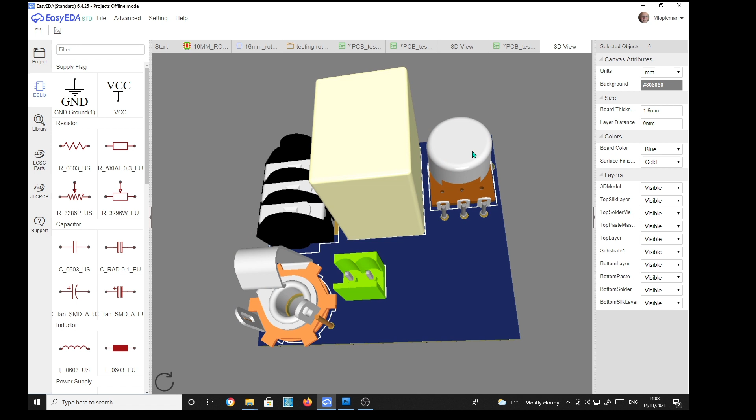Hello. Now all of these PCB component models you see on this bit of printed circuit board were designed by myself. They just came straight out of my old items box, and I decided to make a 3D model for EasyEDA out of them. You see this potentiometer here, I've made it complete with solder pins for it to solder to. It's just a normal potentiometer, not a PCB mounting type. So I've provided these pins for it, which will be soldered to it.

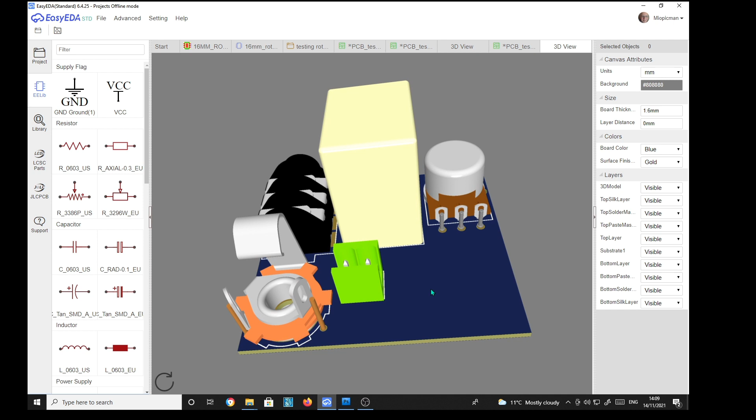And also this skeleton jack. I don't think you'll find a PCB mounted skeleton jack anywhere on the internet. So I've just added these copper pins to represent the connections to the tags and provided some pads for them.

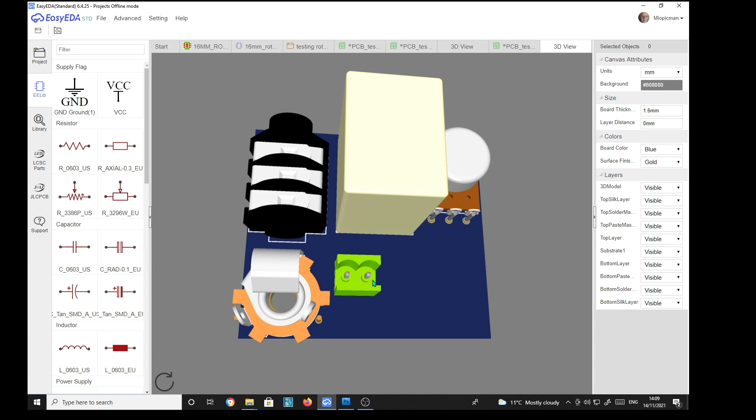This is a conventional PCB mount socket. This is a Bulgin stereo switched socket with normal solder tags on, and I've made slotted holes for it. And also a relay here with ordinary solder tags, which I've made PCB mounting. This one is a 4-pole 24 volt relay.

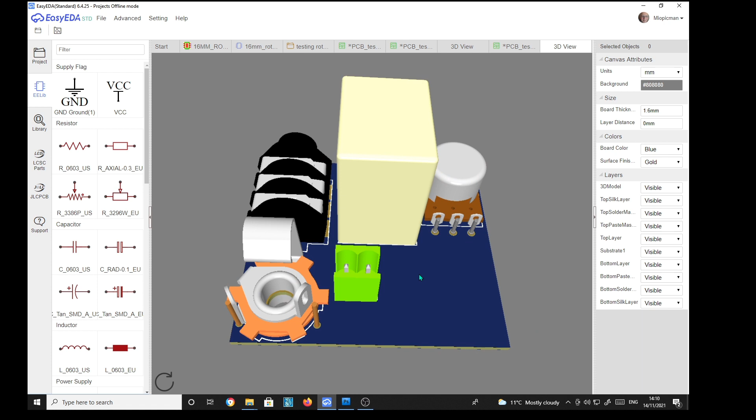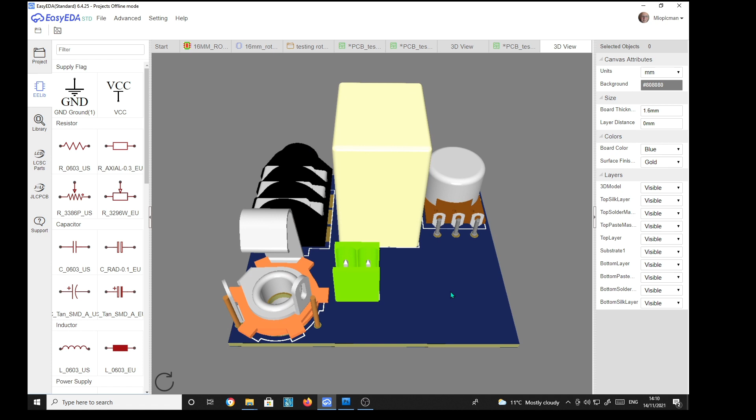So in this video I'm going to show another fairly complex component that I'm going to make. It's a 6-pole PCB mounting relay, and it's actually designed to go onto a PCB. It's got proper PCB mounting tags. In actual fact, it's now obsolete. You can't buy them. So I've got one or two of these lurking about, and I want to be able to put them on PCBs, so I'm going to make an EasyEDA component from it.

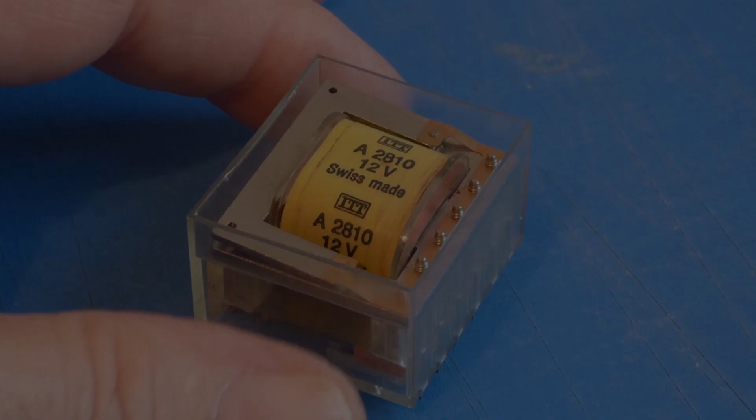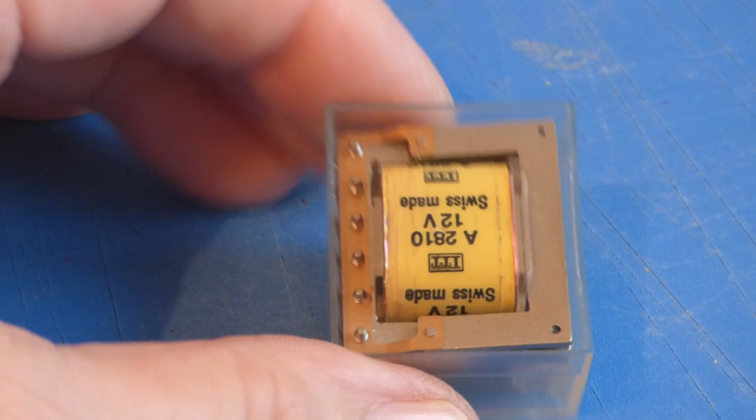And here it is. As you see, it's a 2810 12 volt Swiss made relay having 6 changeover contacts. It's quite a compact little relay this, and I'm sure there will come a time when I need a 3D model for EasyEDA to mount this on a PCB.

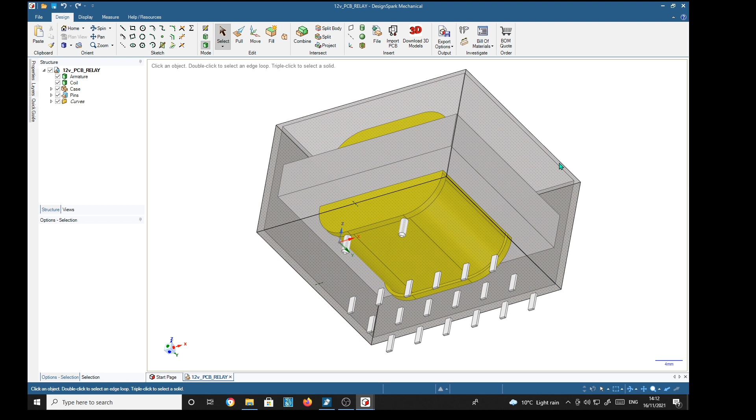So here is a rough representation of the relay I have made in Design Spark Mechanical. It's got all the essential details, which are the size and shape and the pins, contact pins here and solenoid terminals there, all PCB mountable.

So from this model here in Design Spark Mechanical, I'm going to make a footprint and a file suitable for loading into EasyEDA that will produce the 3D representation of the model. So I'll do that part first because it's the quickest.

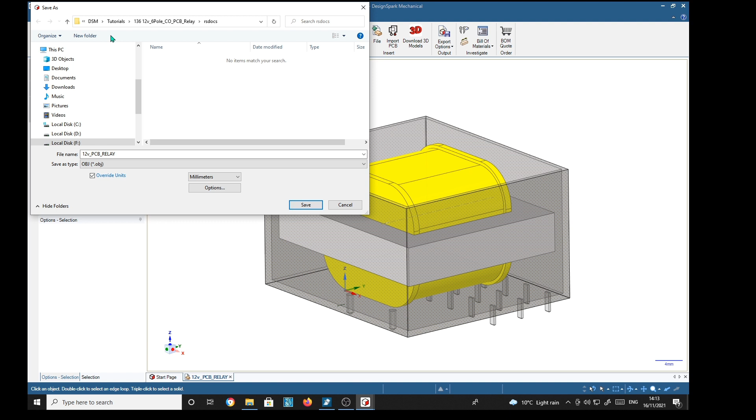So we'll go to File and Save As, and then Save As Type. Now it's OBJ, Object. I've got override units here and I'm in millimeters. So I need to be in the correct folder, which is EEDA. So we'll save that, and if we go to EasyEDA, we see that we have made not only an OBJ file but also an MTL, which is presumably the materials file. This is the structure, this is the materials.

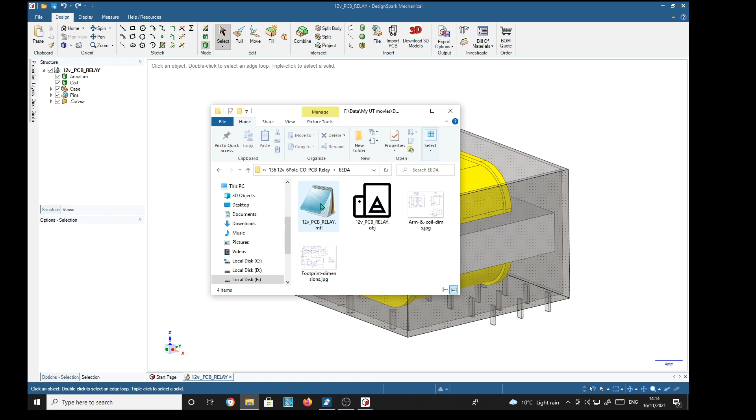So now for EasyEDA, we need to zip these two files together, object and MTL. So we'll control click, we've got them both highlighted, both selected. Right click, go to 7-zip, add to EEDA zip. Now that's the name of the folder that these two files are in. You see up here, this is EEDA.

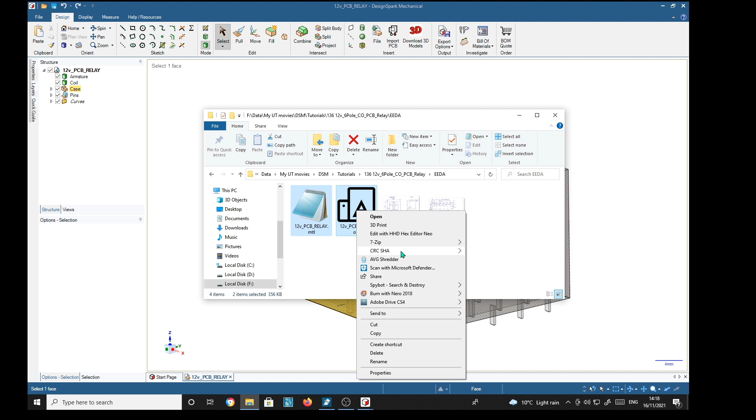So that's worth bearing in mind. If you wanted the zip file to have a different name, change the name of the folder. I suppose you could change it subsequently after the fact. So anyway, we'll select that and we get a zip file. So if we double click that, we should see those two files in it. There they are. Good. So we've got that sorted.

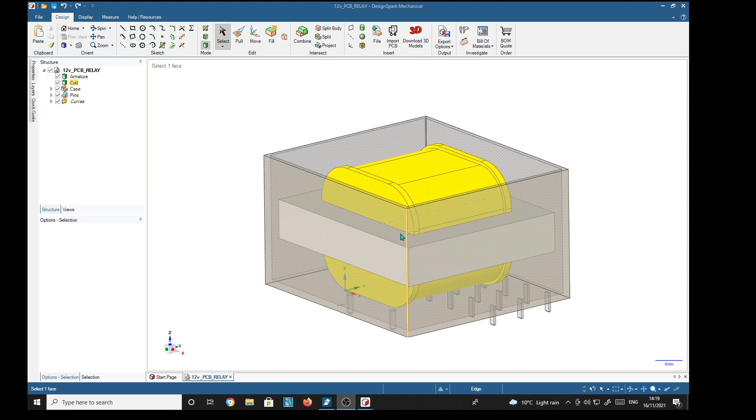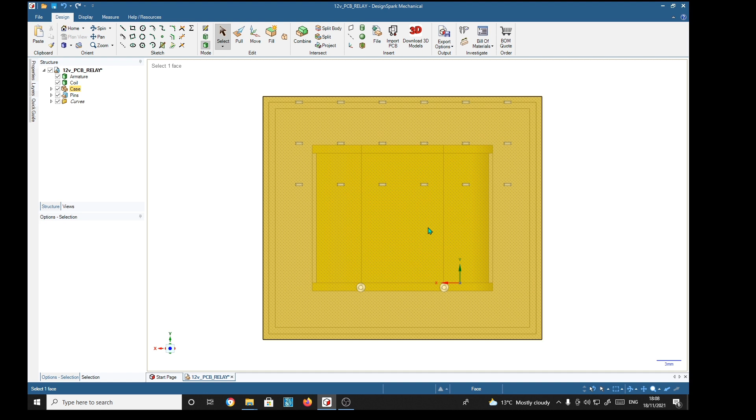Now the next job, just a little bit more complex, is to make a footprint for this thing. Now I'm going to orientate the model so that we can draw a footprint. Square it up down here with this gadget. Bring it a little bit closer. Now I need to draw on something, so I'm going to choose a drawing tool, dotted line. Now you see the cursor is containing a hatch, which means it's asking us to choose a surface to draw on. So we're going to choose this one, right, and the hatch goes away.

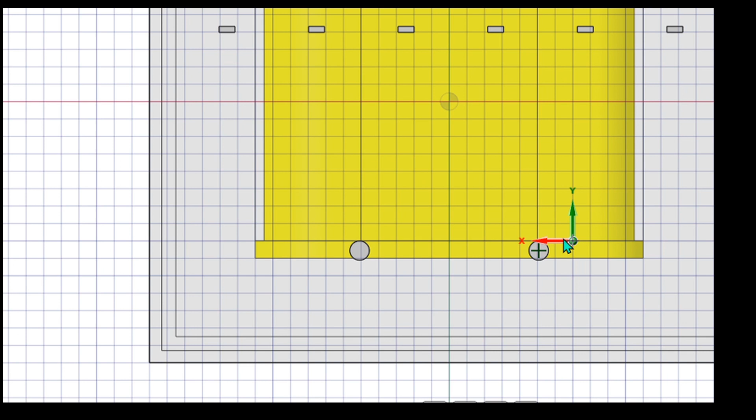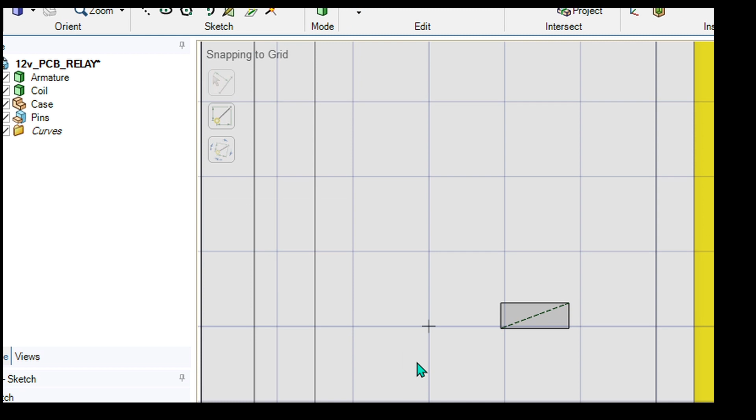Now I want to put circles around each pin, and you'll see why later. But the problem is, if you choose a circle tool, Design Spark Mechanical won't let you find the center of the rectangle. So we need to put an ancillary line in from corner to corner, because now if we try to draw a circle, it will find the center of that line, which is in the middle of the rectangle.

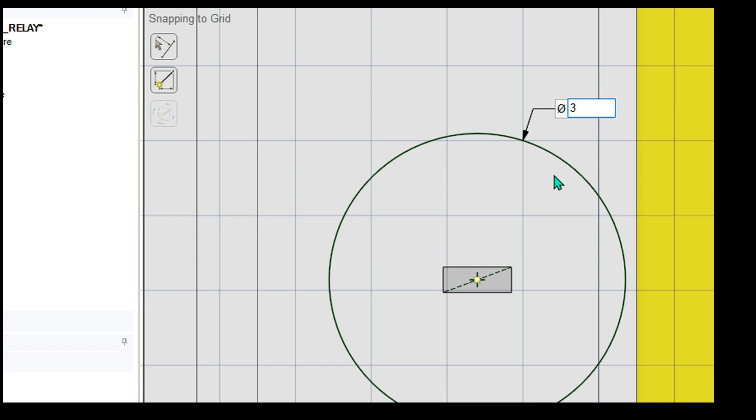So we're going to draw this out to more than 2.5. I'm going to make it 3 millimeters. Oops, that's not 3. 3 millimeters. You'll see why later. And we don't need this line anymore, so I'm going to get rid of that.

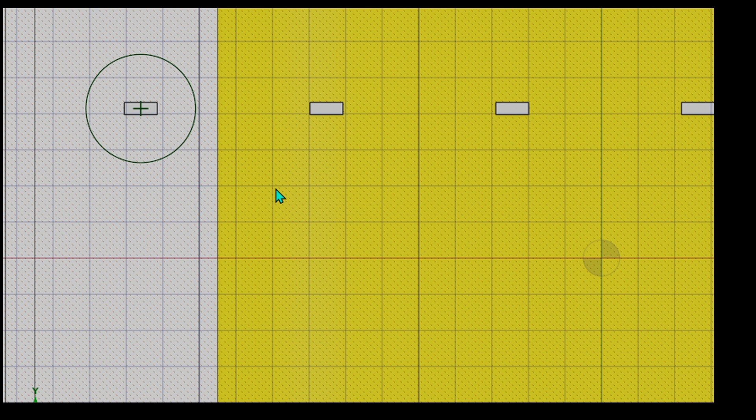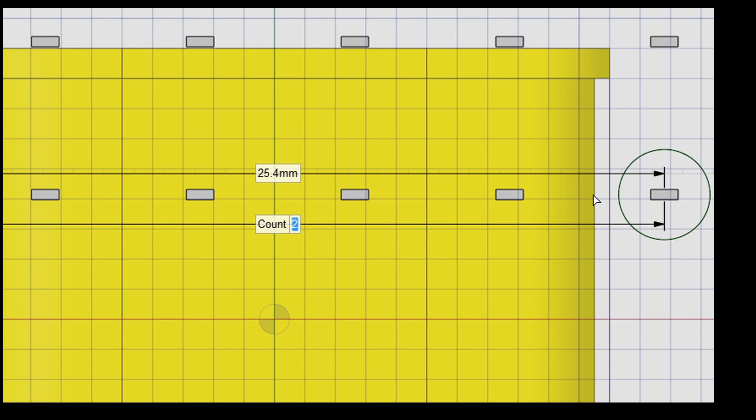Now I'm going to make an array of circles, which means we've got to use the move tool, select the circle, and create patterns over here. We drag it nearly to where we want. I know this has got to be 25.4 - that gets us right to the end. Now the count of 2 is highlighted, so I'll change that to 6. And we've got 6, spot on with the contact pins.

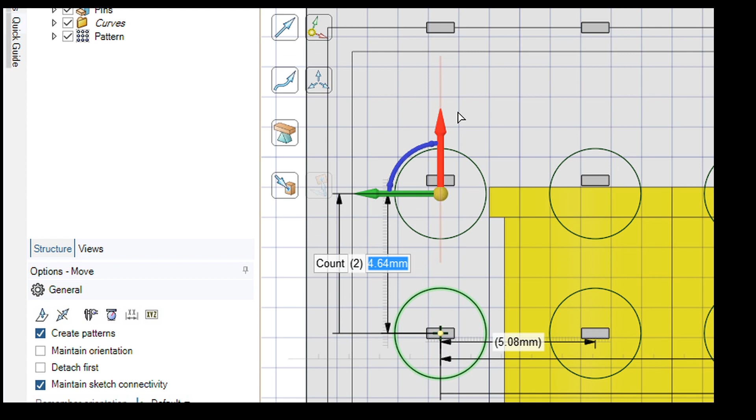Now create patterns again and drag this up to 5.08, which is 10.16. Tab. Now we're going to keep tabbing until we get to this count here. There, 2, we need 3. There it is.

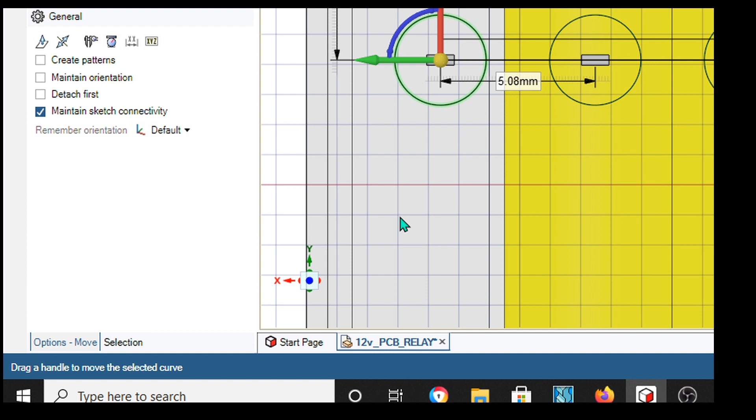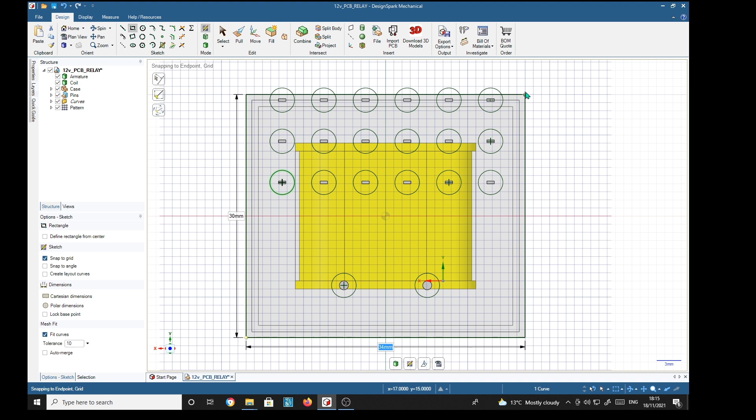So now I'll come out of zoom and we can finish off with the solenoid pins. So we can have one there and one there. And finally we need a bounding rectangle for the footprint. Now if we leave it there, the top line's going to go through the pads, so we'll go one up. There we are. Now we can turn these off.

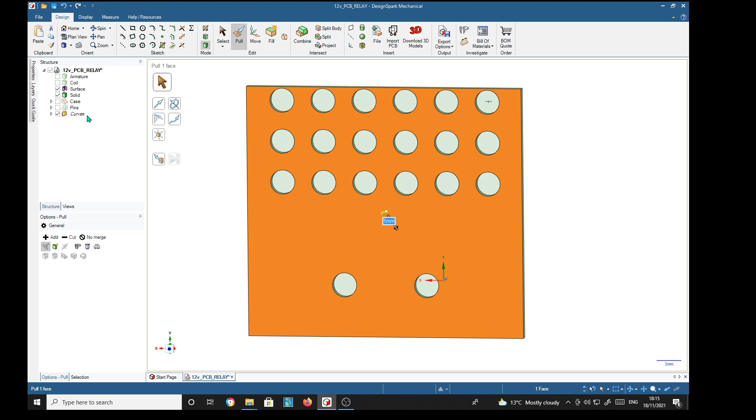We've got our footprint. If we pull the tool, select the surface, type 1 for 1 millimeter, and that makes it into a solid. We've got surfaces in the holes, so we can cancel them out, delete them. And what's going to happen in EDA is that these holes are going to just turn into circles.

So we'll square it up and save it as a DXF file. Save as. DXF. Now we'll save it on top of this one. Replace it, yes. And that's it. Now we can start to make our EasyEDA component.

We'll start with a new symbol. I'm going to base this on some sort of switch or contacts. Maybe there's one in the library. Yes, so I'm going to use this. Double click. And there we have our set of contacts. And we're going to end up with 6 of these.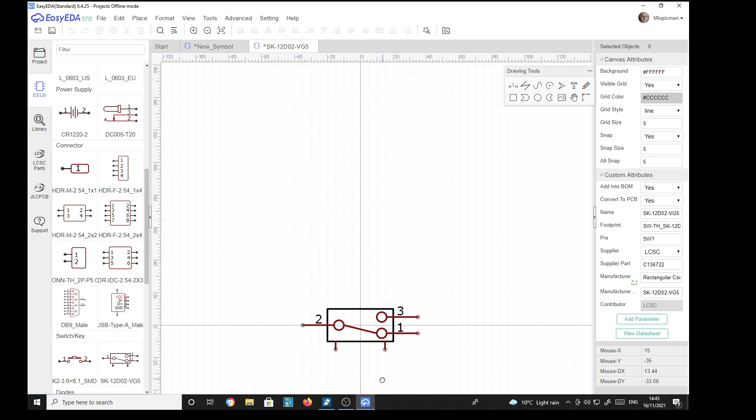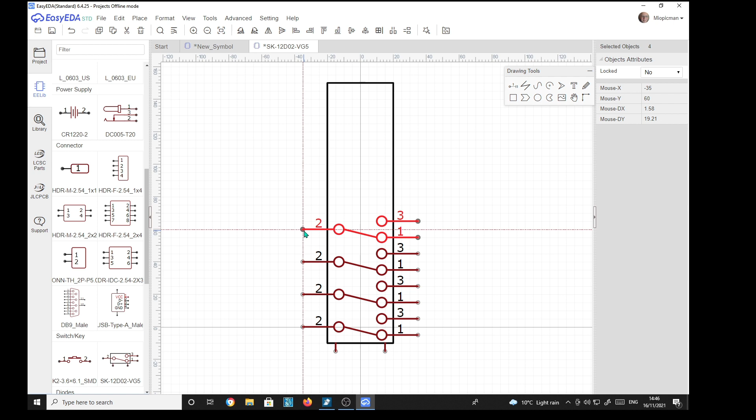I'm going to extend this up quite a bit and grab this lot, copy, paste. That's 1, 2, 3, 4. This 1, 2, 3, 4. This... 5 of them. This.

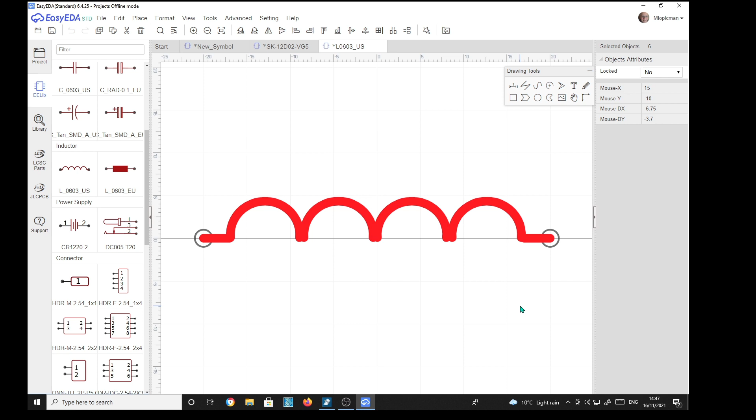Now we need a representation of the coil rather than just these 2 tabs here. I'm going to put a coil in. So where will we get that from? Ought to be a coil somewhere. There it is. Double click. Right, going to capture that, Control C, go back to a new symbol, Control V.

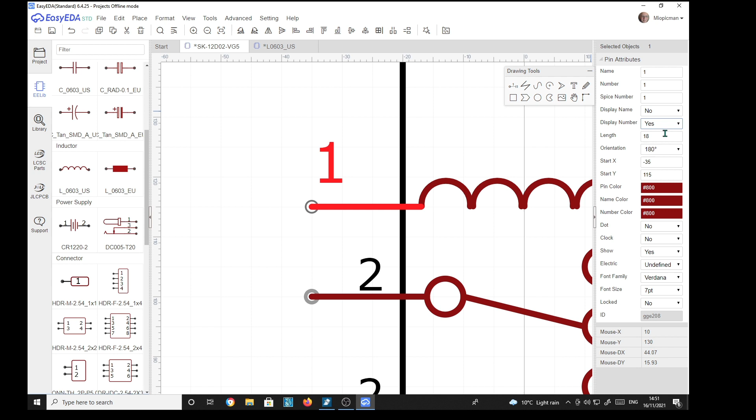18, that looks better. Let's change it from display number from yes to no. Yes. Right, we'll do the same here. Drag this out, length 18. And display number, yes. It's saying snap is 5. I'm going to make that 1. Nice.

That looks big. Now that 3 is 5.5 point. This 2 is 7 point. Now why did that happen? That 1 is also 7 point.

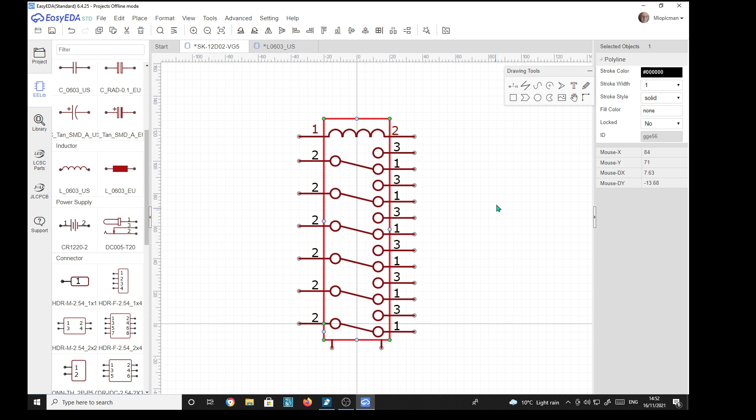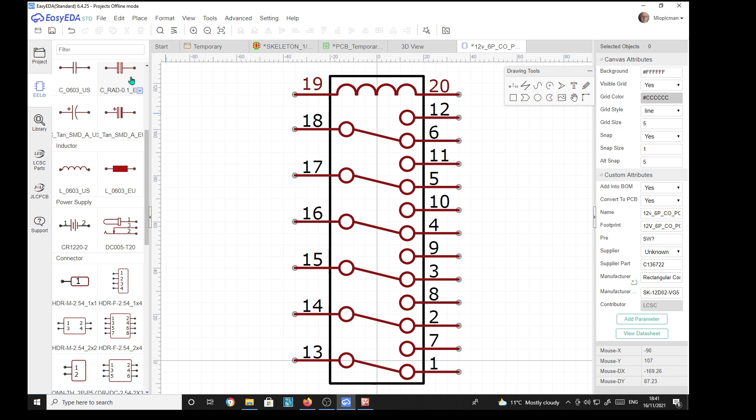And before we can save this, we need to renumber all the pins. Save as. Unknown others.

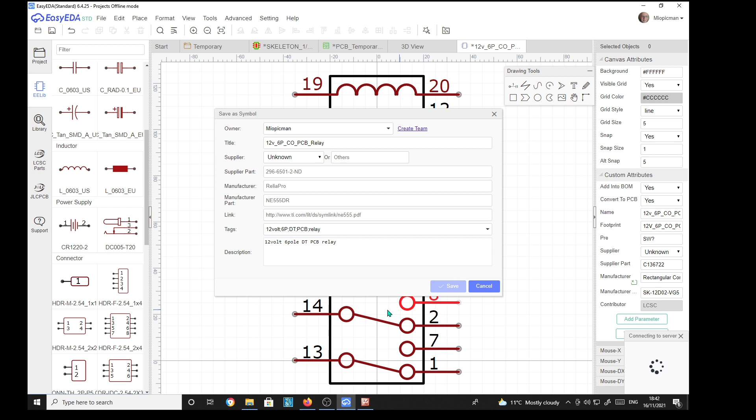New footprint. File, import DXF, select the DXF file, that's the one. Right, and just put it anywhere. Let's put the reference in.

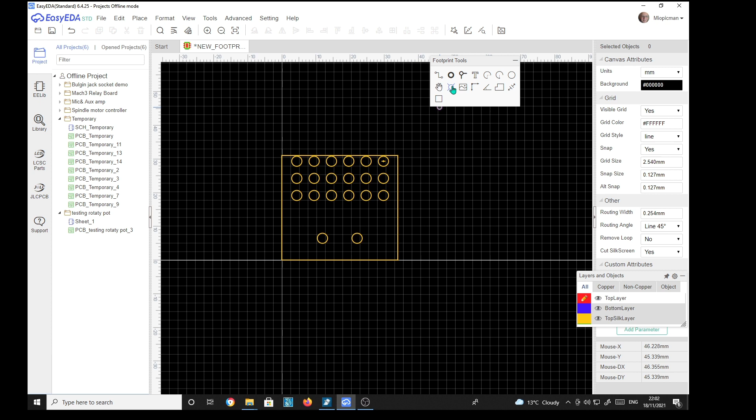Right, I'm going to make that one the right size. Now we're going to make that 2.5 with a 1.25 hole. You can copy that and paste it in to the center. See, it gets a dot in, which is nice.

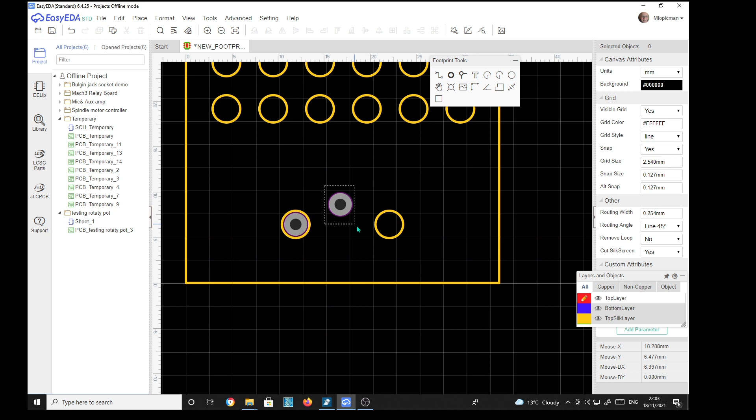Now, so we paste the rest, Control V. We need some more. Okay.

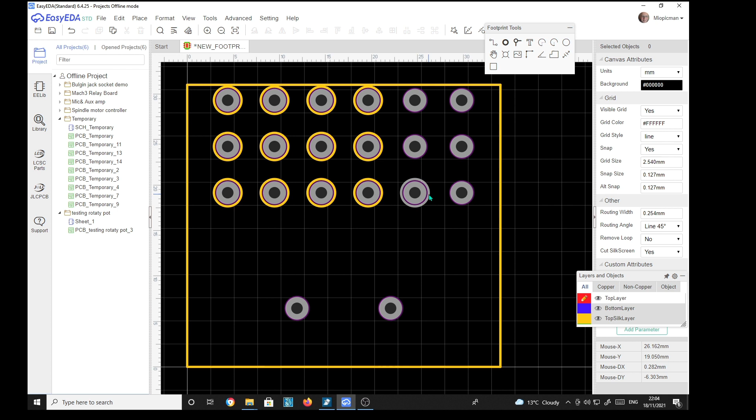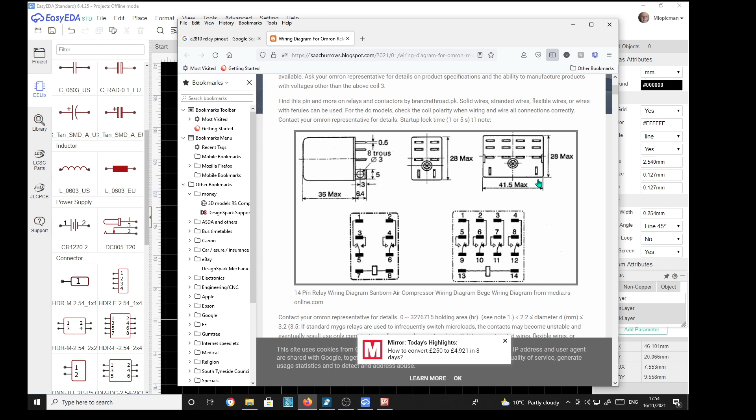Now to finish the job, we've got to add the pin numbers for these pads. I found some information on the internet, which is not for the 6-pole. I couldn't find anything on the 6-pole relay, but here's the 4-pole version, and it's numbered 1, 2, 3, 4 from left to right across the top. So that's what I'm going to do: 1, 2, 3, 4, 5, 6, 7, 8, 9, 10, 11, 12, 13 and 14. But I've got 6 poles, so they'll be a bit different.

So here we'll go with the footprint. Right, we'll start with 1. It is 1, that's fine. And 20.

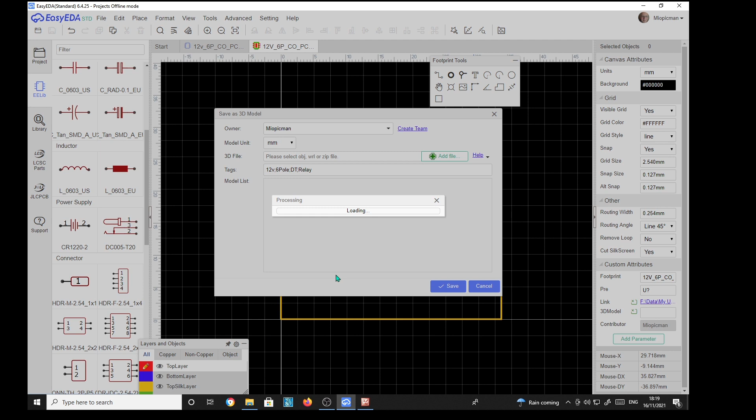Okay, that's that finished. Now we have to save it. Save as 12 volt. 12 volt. Save. Right, save. 3D model, zip file, zip. Save. Success. Twelve volts, there we go.

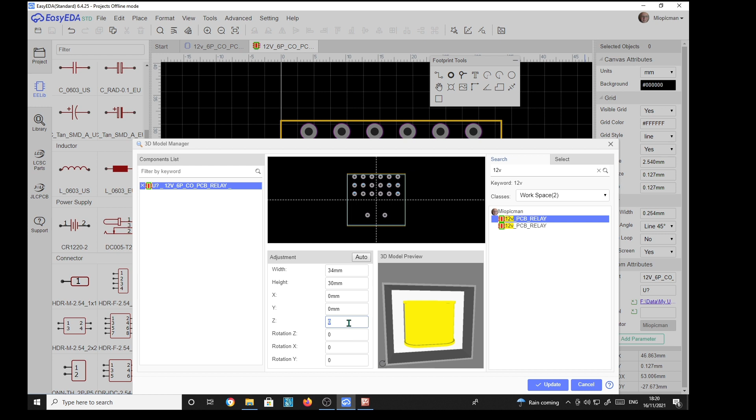It's not coming through the board quite yet, so I need to change the Z. We'll change that to -2. See what we'll get. Right. -3.

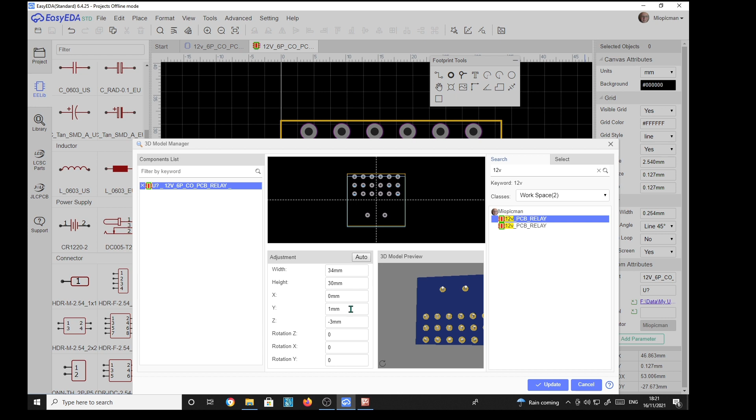We're not quite aligned in the Y direction. Y, we'll try 1, see which way it goes. Right, too far. 0.5. Whoa. That looks really spot on. Look at that, that's it.

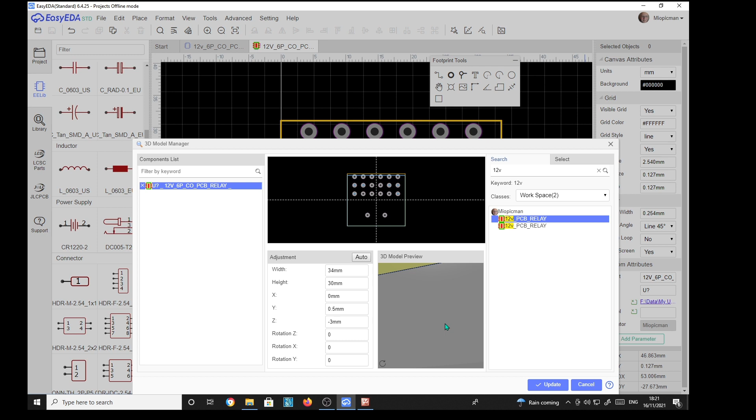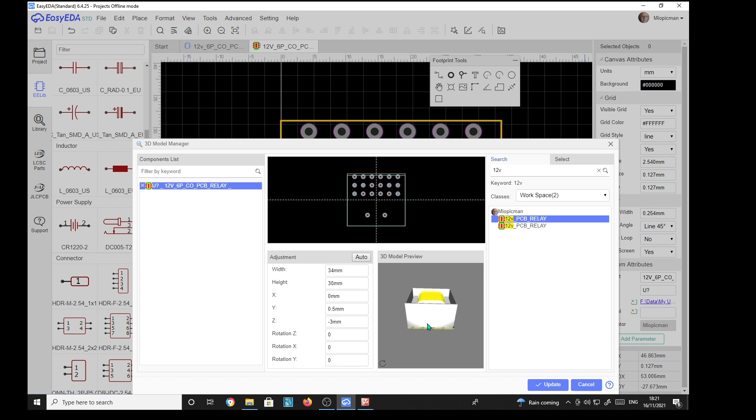Just noticed the case hasn't come out transparent, but that's not terribly important. Right, we'll do an update. I'm just going to save it just in case. Successfully.

Right, we've got a temporary project going here. Right, we'll see if we've got a 6-pole relay. 12V, 6-pole - that's right, that's right. Footprint. That's right. That's right. Model, 2 have appeared.

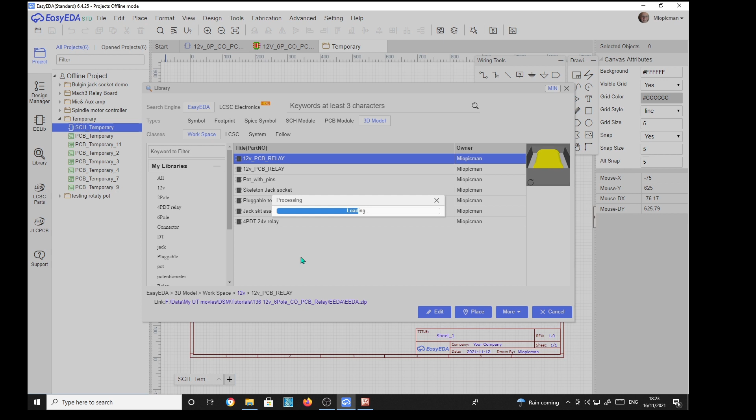And they're both okay. I'm going to right click one of them, delete it. No. Edit, delete. Do you want to delete? Yes. Right, still got one. Yep. Okay.

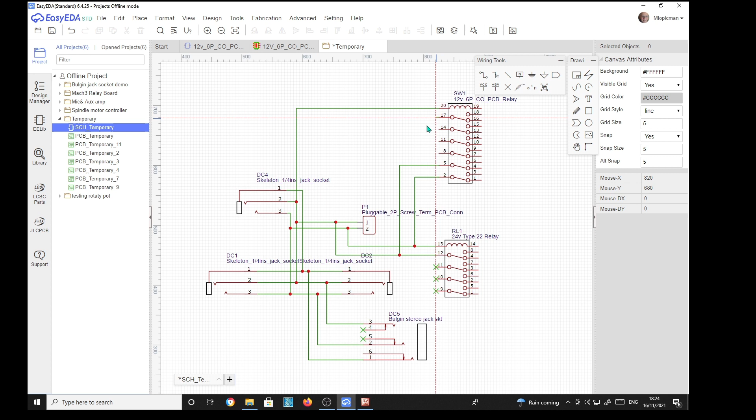Place. Work the symbol. Select it. Yeah. Just connect a couple of wires. And now that we've saved it, we can convert the schematic. No, we're not bothered to check. Keep going. Apply.

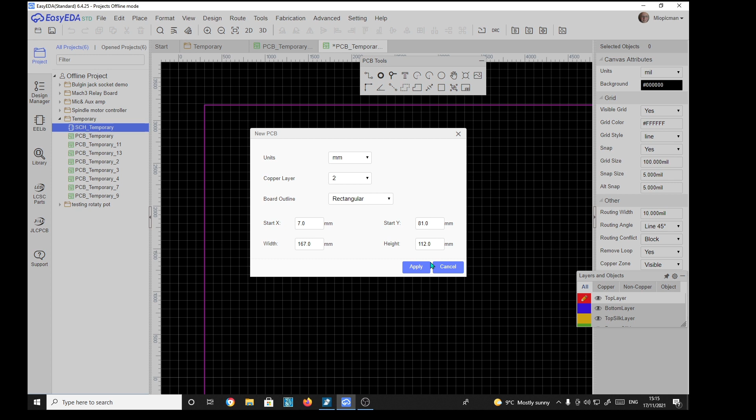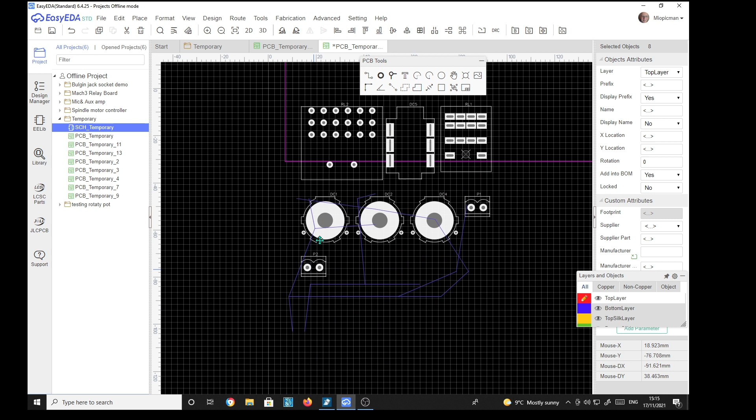And lo and behold, there is the 6-pole relay. And if we grab all these goodies and drag them all within the perimeter, and select the perimeter and then press the delete key and go up here to tools, set board outline, apply, and it fits it nicely.

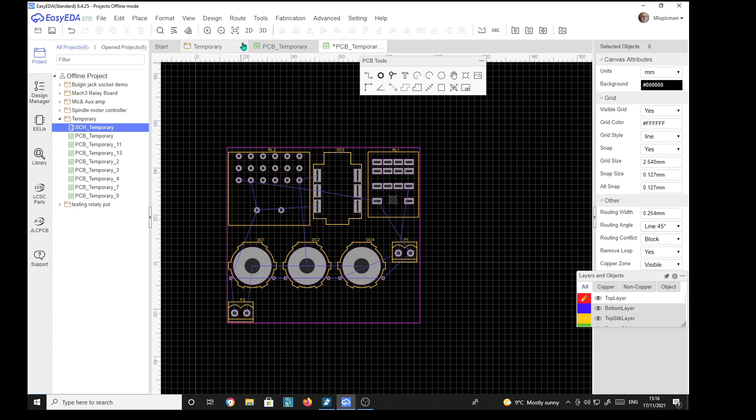Now we can look at a 3D version of it, hopefully. And as if by magic, we've got our relay and all the other gubbins. What do you think of that? I think it looks very nice. Well done, EasyEDA.